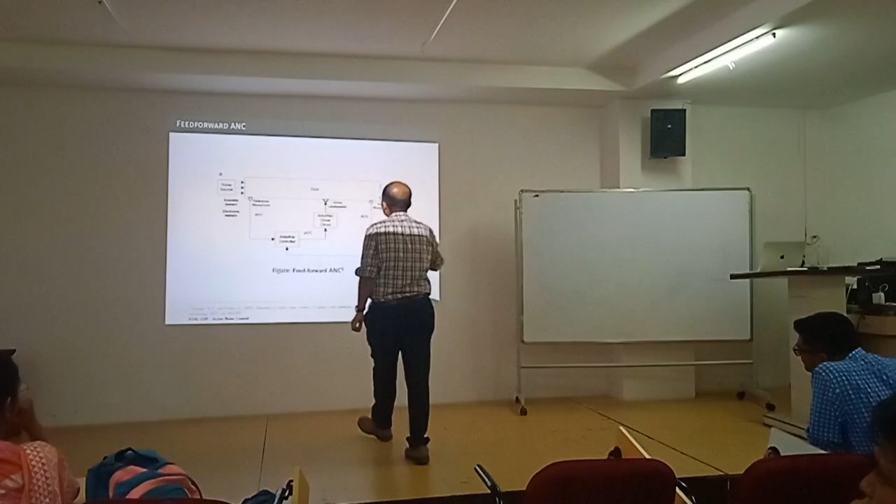Now from the bell experiment, what do you know? That if I want to cancel that sound, because energy has already been produced, I may have to produce some other energy to cancel that sound. That means some sound has to be created. Who can create the sound? A loudspeaker. That means one loudspeaker should be there. So what I did is I bought one loudspeaker and connected it somewhere in this tube.

Okay, I understood. So you have to go step by step for this diagram. First step is there is a duct, a tube through which sound is coming from outside. Then I have a noise source here. I want low noise over here. And now I know that if I want to cancel it, I should create some new sound. So I bought a speaker and put it in the tube.

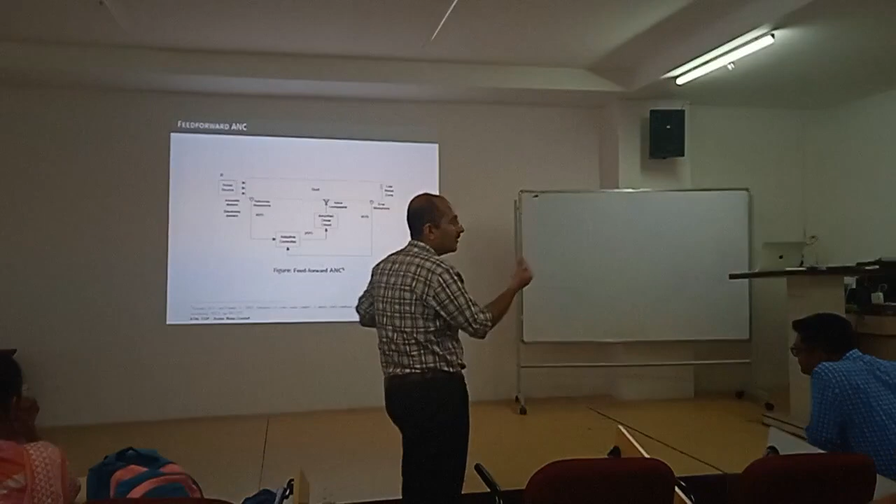Fine, now what all do I need to know? I need to know what type of noise is coming from outside, because I have to cancel based on what is coming. If you remember in that bell experiment, they connected something on the bell - some sensor was connected on the bell. That sensor is a vibration sensor, because sound is proportional to vibration, correct?

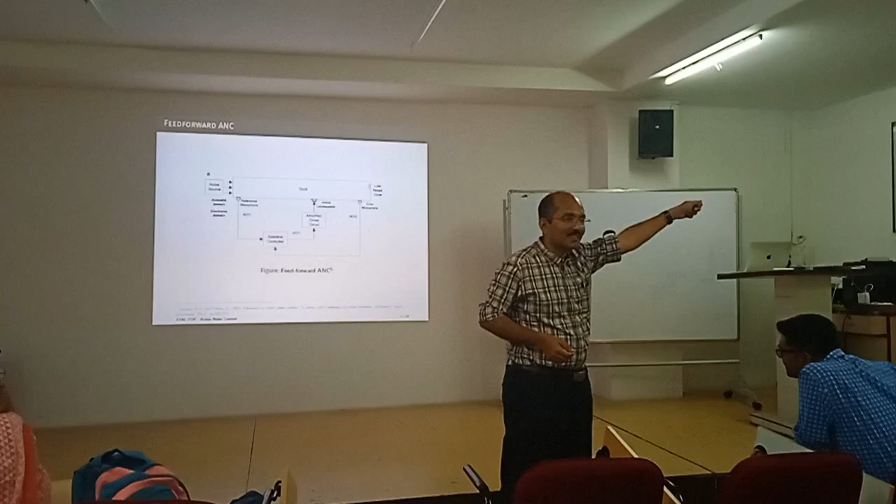So instead of putting a mic there, they put a vibration sensor on top of the bell. I should have some idea about the nature of the input signal. So in our case, because it is sound, I will put a mic outside my room, near the compressor. That mic is the reference microphone, so that microphone is my reference microphone.

Understood? So you have a noise source, you want low noise to be there, you have a duct, so you added one speaker, you added one reference microphone. Understood? This is how you are developing the problem. Nobody told Bose that this is how ANC is going to happen. By thinking, they have developed that this is how it is going.

Okay, fine. Then I should also know how much is the noise level around your ear, because that is what I should reduce. If you are only sitting here, I want noise to be cancelled only here. I don't want to worry about noise here. Correct? So I should have a measure of noise around your ear. How will I measure noise around your ear?

Put another sensor. Which sensor? One microphone. That is the error microphone, where I should put it near the low noise zone, because I want to measure whatever is the level of noise cancellation which is there. So I am putting a second one.

Understood? Now you know why I have two mics and one speaker. Is there any confusion on that? Why do I have two mics and one speaker? It's very costly. The speaker is costly, mic is again costly. Why would I unnecessarily buy two mics and one speaker?

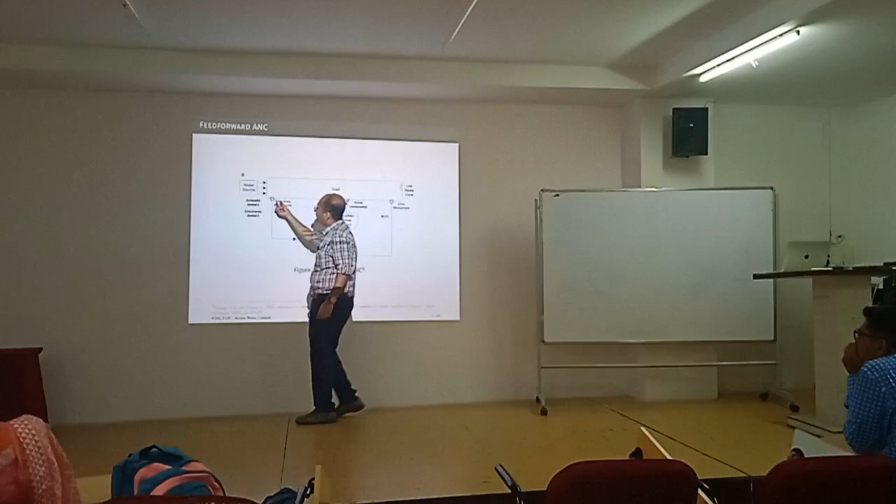So what I am saying is, you put a microphone, measure this, give it to a controller. Controller is some pole zero diagram. Finally, it is some pole zero diagram. Given to the pole zero diagram, that means the signal is modified and played through the loudspeaker. But where should I move the pole and zero here? I should move in such a way that this error signal is getting reduced.

Or I can say this E of n has to be reduced, or a square of the error has to be reduced, like in a machine learning problem.

Is this problem an optimization problem? What is an optimization problem? Give one example of an optimization problem. Maximize marks is an optimization problem, is it not? Because I am doing so many things to maximize my mark in the course. So that is an optimization problem.

Here my optimization problem is minimize error square or some function of error. Minimize error square. So what I am doing is I am trying to change my controller, or control my controller, in such a way that error square, or the signal level near your ear, is to be minimized. This is the problem. Now the question is, what is the algorithm and how will I know the algorithm?

Is the overall problem statement clear? Is the overall problem statement clear? Is the overall problem statement clear? Clear? Clear? Sure? Okay, now how will I decide the control?

All of you control system people, so you tell me, how will you decide the control?

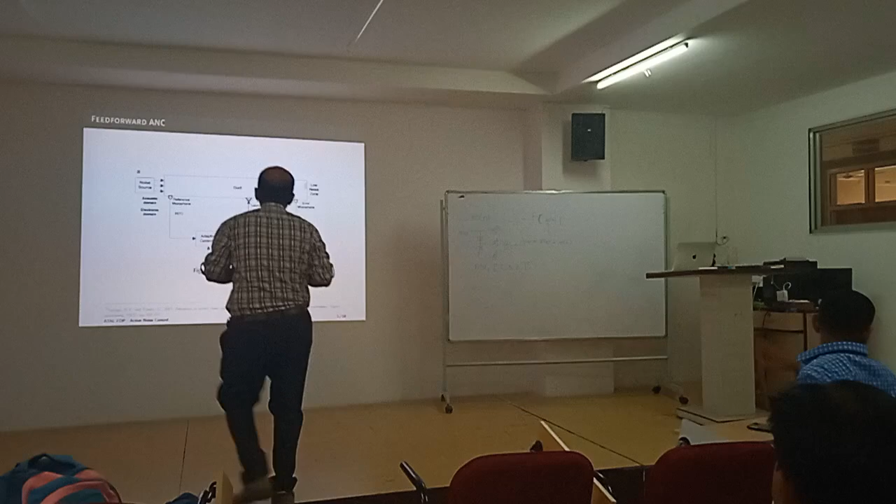What is the relation between Y and E? Difference of input and error signal. What is this one? Difference between input signal and error, this one and this one.

That will output. No, but this signal also contains signal which is coming from outside. Understood? Because if I put a mic here and say hello, that mic does not contain just hello, it contains hello and then something. So the mixture is measurable, your sound is not measurable independently.

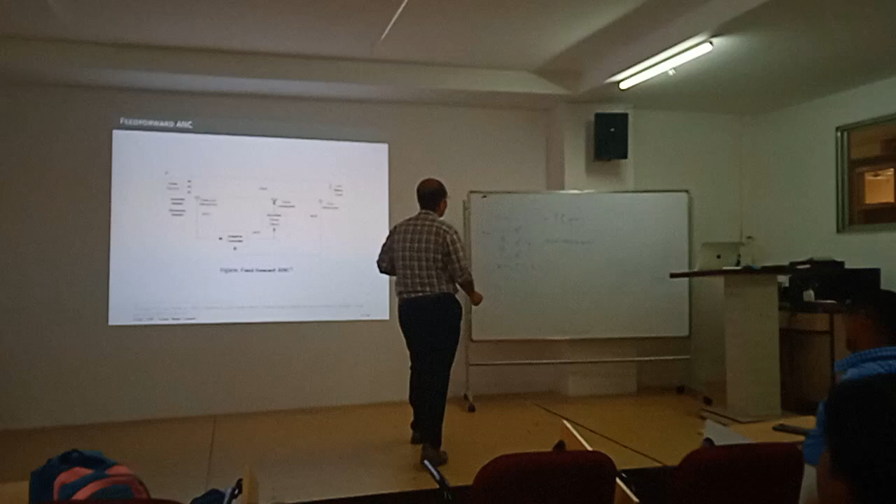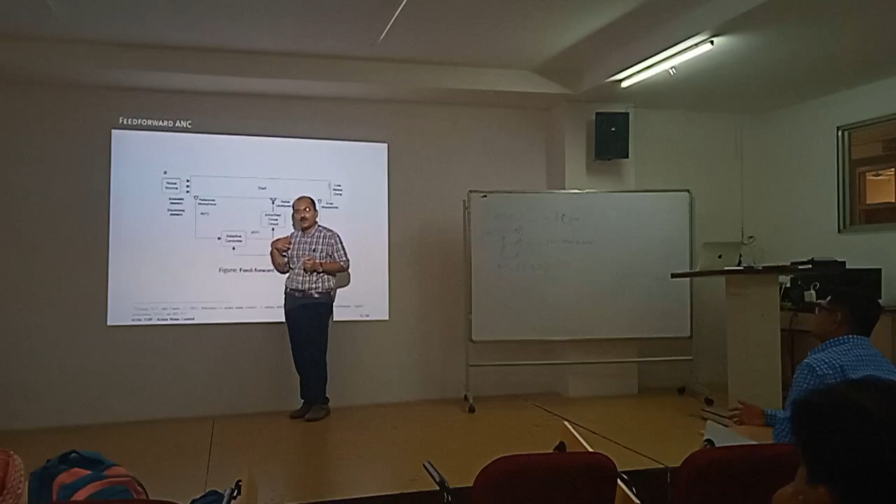But that is not going to solve my problem because I want to know what is the relationship between Y and E. For example, suppose I switch off this. Then what is the relationship between Y and E?

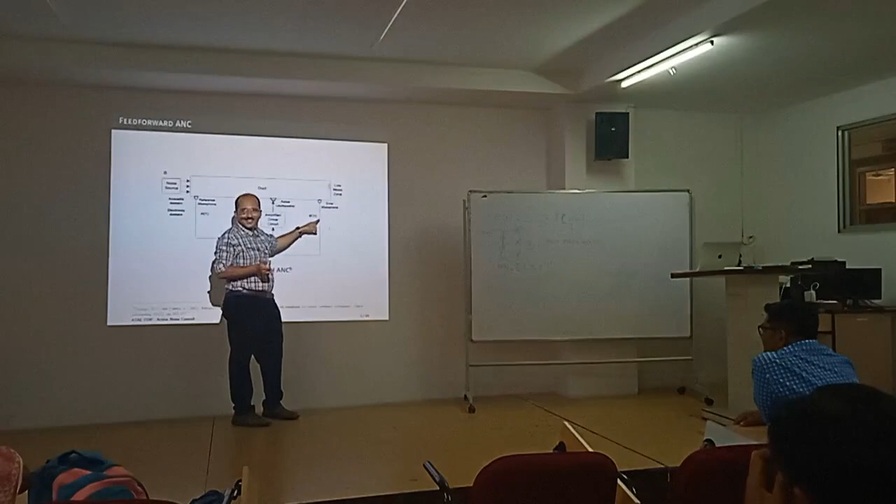Because now I switched off the AC, so no sound is coming from here. Whatever E is going to be there is only due to Y passing through this. What is this? That is a system. It is a system. What is that system? System has an amplifier, a loudspeaker, some air in between, and a mic. That is the system. But what is the input and output relationship of that system? How do I know?

How do I know? Because I don't know any equation of the loudspeaker, I don't know any equation of the microphone, I don't know any equation of the air in between. But I am asking you, for this physical system, what is the relationship between the input and the output? So whenever you have a physical system and you need to find the relationship between input and output, what should you do?

You should do system identification. What is system identification? Modeling, finding the transfer function. If I want to solve an ANC problem, step number 1 is that you do modeling, which is going to behave similar to that of the physical system. This is called system identification or modeling process. So step number 1 is a modeling process. Got my point?

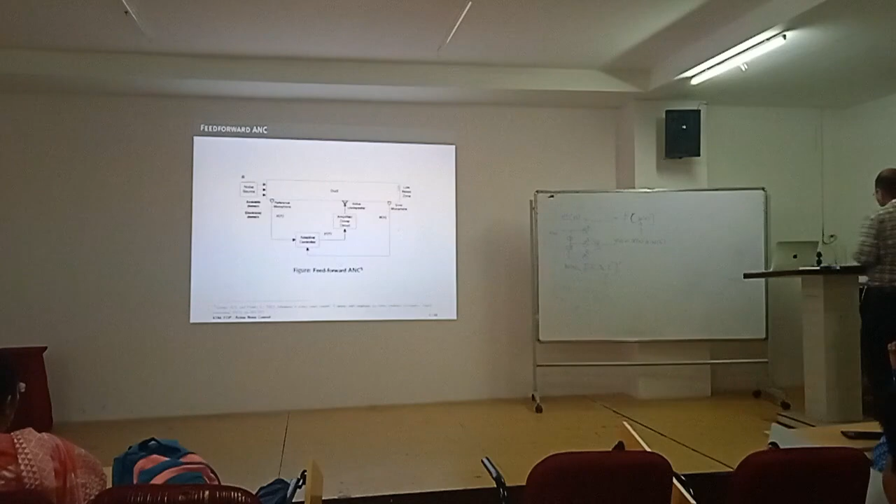So I formulate another optimization problem where I say you generate a random signal, play it through the actual system. What will actual system produce? Actual system will produce some output.

Play the same signal through the model. What is the model? Some filter, this type of filter where I assume the multiplier values are all zeros, or like exactly how we do in neural networks. So you have a physical system, you play some sound, same input signal through this model. This model is a filter where multiplier values are zero or unknown or random. What will that path produce? Some other output. Physical system has some output, model has some other output.

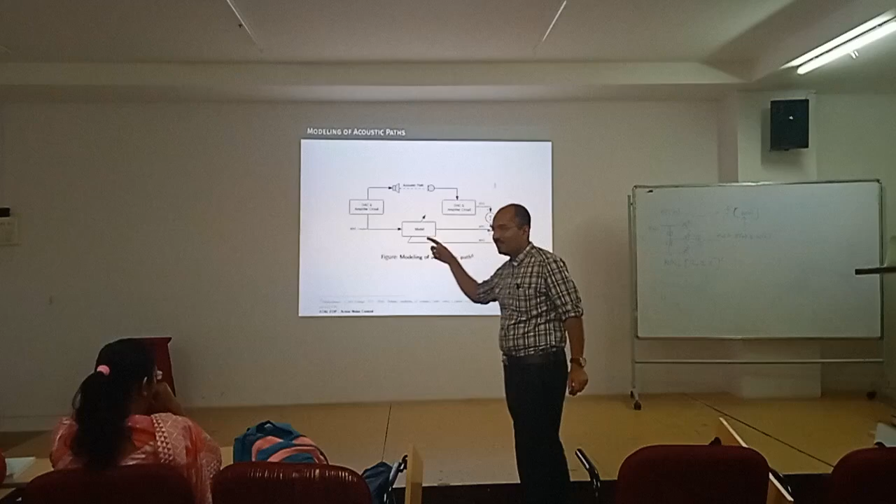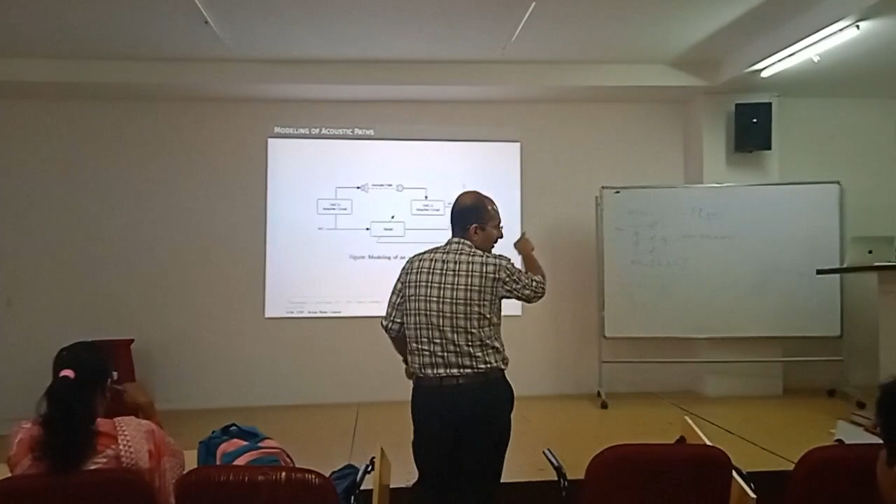So there is supervised learning happening. That means I need to again do an adaptation of the controller. Which controller? The model, which is the filter, such that this error square is minimized. You can imagine this is exactly a neural network function approximation problem. Function approximation, you do exactly the same thing, but here everything is linear, nothing is non-linear. So what we are saying is you do that adaptation.

Now if I do that adaptation, what is the model? This is this, where instead of 2, 3, 2, I have mentioned A0, A1, etc. I have created a vector A, just to generalize it. What is this X vector? X vector is x of n minus 1, etc. These are the two vectors. And what is y of n? Y of n is the output of the model, which is input convolved with the multiplier, which is also equal to A transpose X.

What is the output? 2 into this, plus 3 into this, plus 2 into this, add them together. That's the same one. So I am able to write an expression for y here. I will come back again, but let's see if you are able to understand or not. This is all simple only. But there is one very big point I want to say, that you don't need to study any of this.

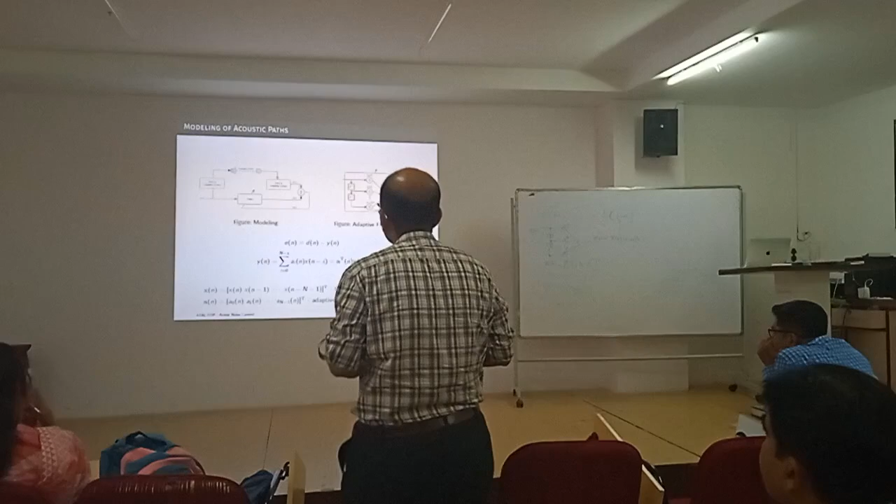Expectation of xd means how correlated are the input and output of the system, which is called cross correlation. Cross correlation means cross correlation between two signals. Which are the two signals? X and D. So I am defining one term called cross correlation, where you can imagine that as how related are X and D. So suppose I have a barrier in between, but this mic is picking up some other sound. So what is the correlation between X and D?

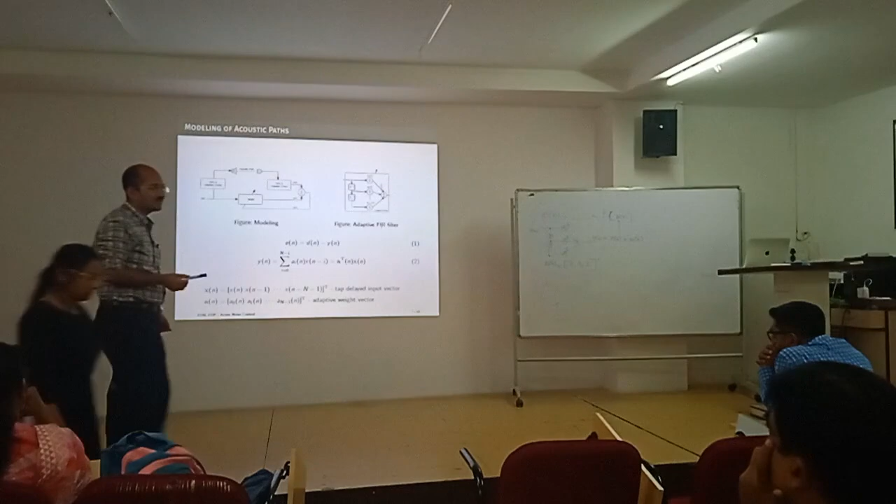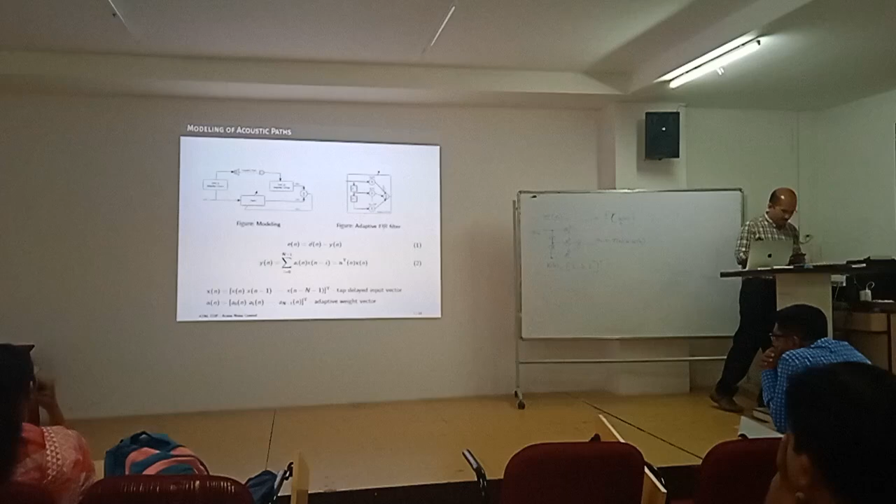Got my question? So right now what I am saying is D is fully produced by X. So D and X are correlated. There is a finite correlation between D and X because D is produced by X passing through something.

Now I am saying there is a barrier in between. So whatever sound is produced by the speaker is never reaching the microphone. But some other signal is coming because mic is there, it will pick somebody else talking also. So now what is the correlation between X and D?

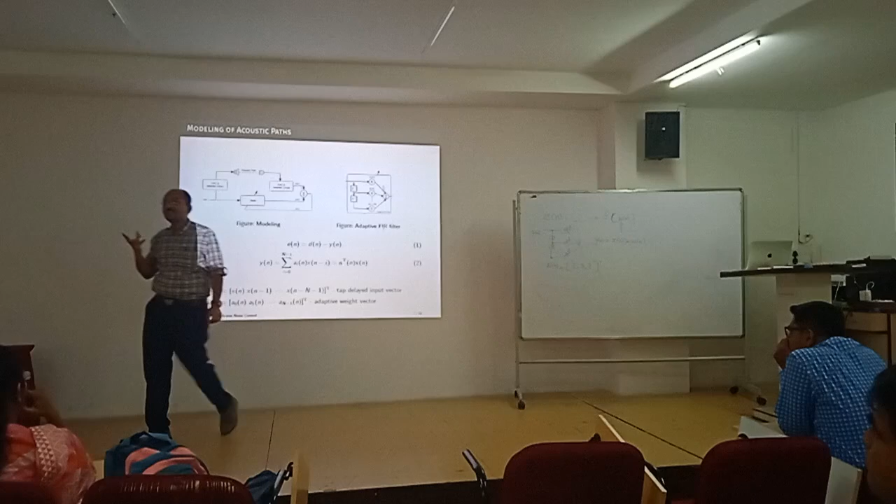Is D anywhere related to X now? See what am I saying? I am saying there is a barrier here. So this sound is not reaching here, but this mic is picking some random sound. So this D and this X, what is the relation? No relation.

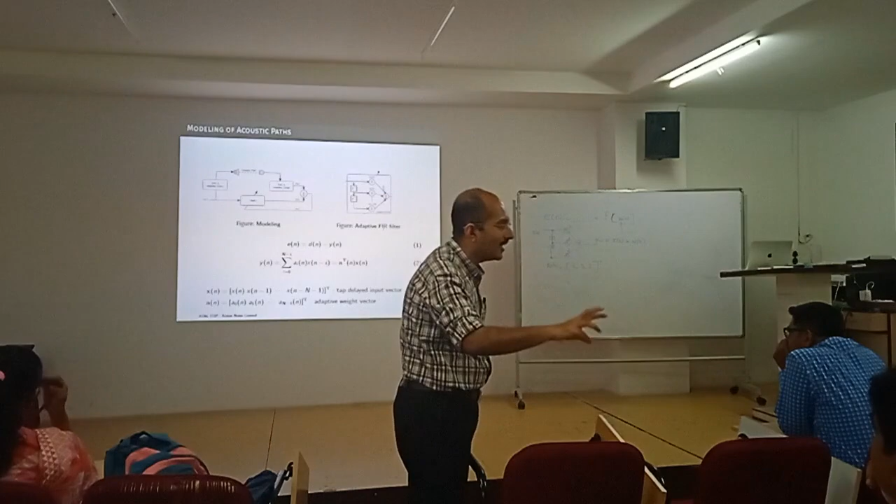There could be a situation where X and D are uncorrelated, but suppose the barrier is porous, like this, somebody is shouting there and we are able to listen here. So porous, what will happen? X and D are finitely correlated, but not fully correlated.

Understood? So we are defining the most important term of this lecture, which is correlation. Correlation means two signals are there. Are they related or are they not related? That is the simplest meaning of correlation.

See this expression, expectation dx is what? Cross correlation. Correlation between what and what? The d signal and the x signal. Then I am defining a new variable p. So the variable p in this entire expression is the cross correlation vector. This is called the cross correlation vector.

What is the meaning of cross correlation vector? How related is this signal x and signal d? In a normal case, fully related. Some cases slightly related. In some cases not related at all. Is that clear? Fine. Now you have here another term which is expectation of x transpose.

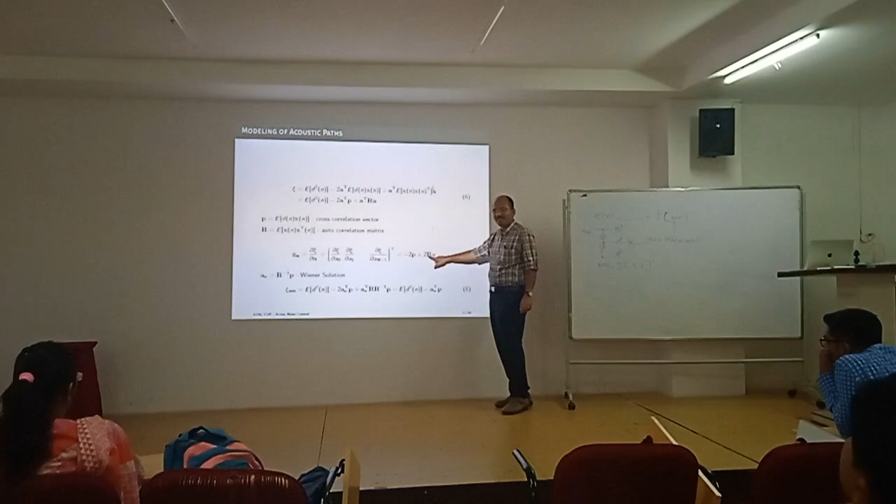The derivative is 0, so I can say minus 2P plus 2R is equal to 0. So my A optimal is given by R inverse P. R inverse P is the best possible value of the model. This is called a Wiener solution.

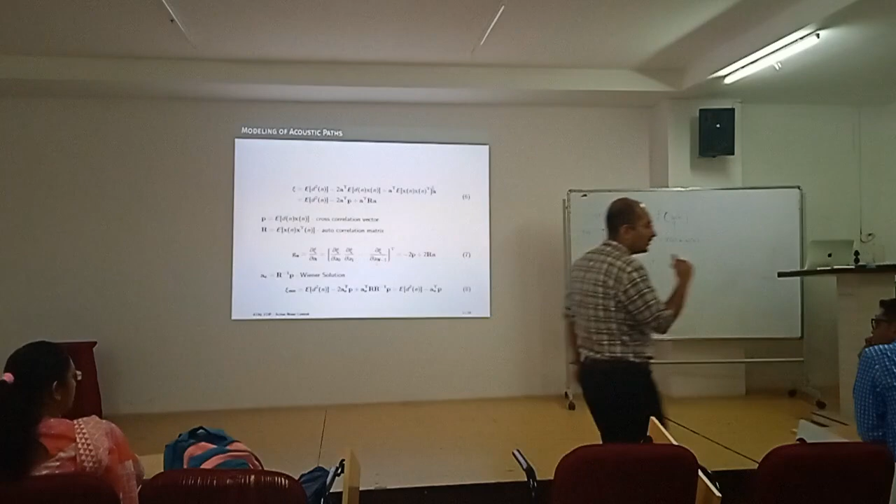What is it saying? That the best possible theoretical model you can find, or the filter which is equivalent to the path between the loudspeaker and the microphone, is given by this equation called R inverse P. That means this is dependent on autocorrelation and cross-correlation. Autocorrelation and cross-correlation depend on P, on how X and D are correlated. This is the most important part.

Okay, you got some idea now? There is a system, there is a model, there is correlation, there is autocorrelation, there is cross-correlation, there is system identification, and then everything goes into ANC. Understood? So by doing this process...

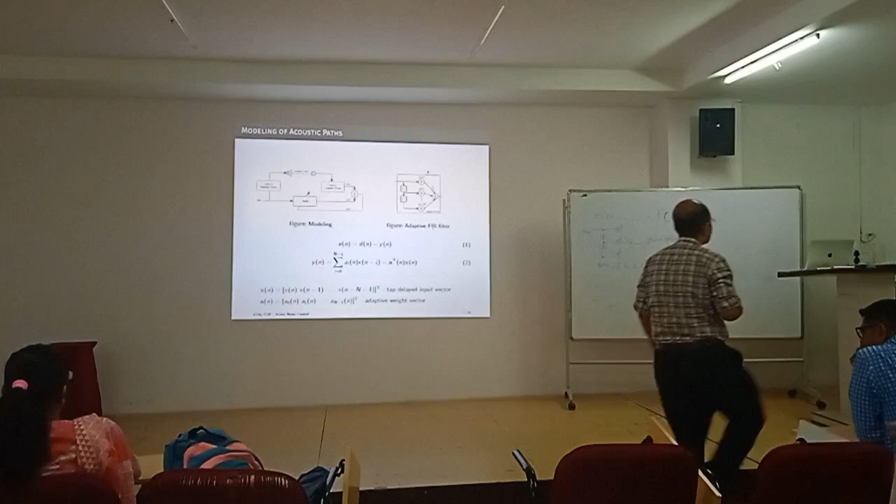So there is a combination of filters created here. Now what should I do? Run the next optimization, because we already did one E-square minimization to find the optimal value, to find systems. Now you are running the ANC's E-square minimization. If you do this E-square minimization, you will be able to find the update rule for updating the controller values. Okay, fine.

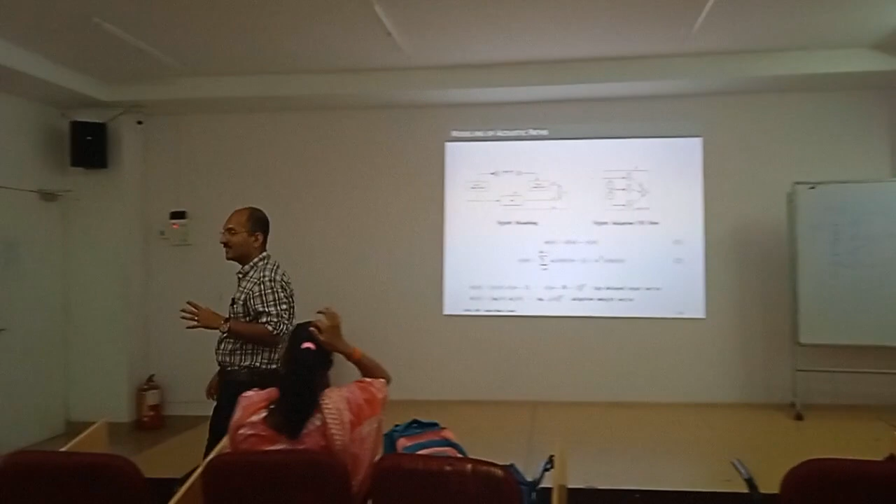So you can pause it. We are doing controller design with physical systems. Whenever you want to design controllers for physical systems, you need to create models, because otherwise you cannot write the algorithm. You have to write the expression and take derivative, but you can't write the expression because I don't know how the AC behaves, I don't know how the physical system behaves. But I know how models behave, because models are filters, and models are within the domain of electrical engineering. The system is not in our domain, it's a chemical engineering system or a mechanical engineering system which we don't understand.

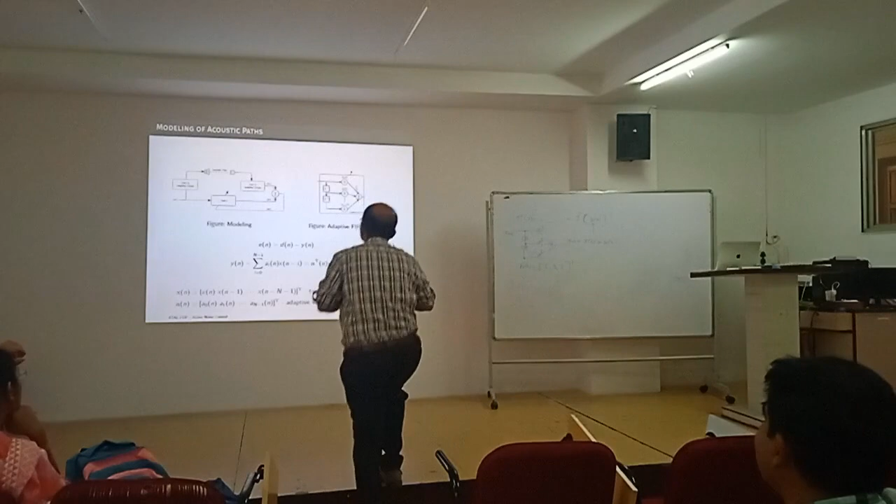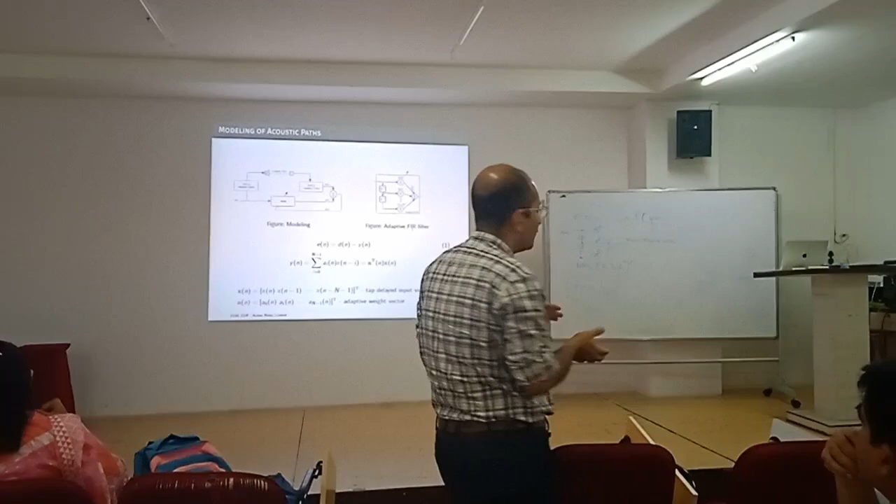But we understand systems, so we will model it and use it, not the actual system. That's what I am saying. So what we have done is, we have a physical path and I want to create a model of that path. So I generated some random signal, played it through the loudspeaker, put a mic somewhere, and measured the output, I got some value. The same input is given to a filter with some random value, and you get some output. So you have a difference between the output of the actual physical system and the model. You try to minimize that cost function, and we know how the cost function is going to be minimized.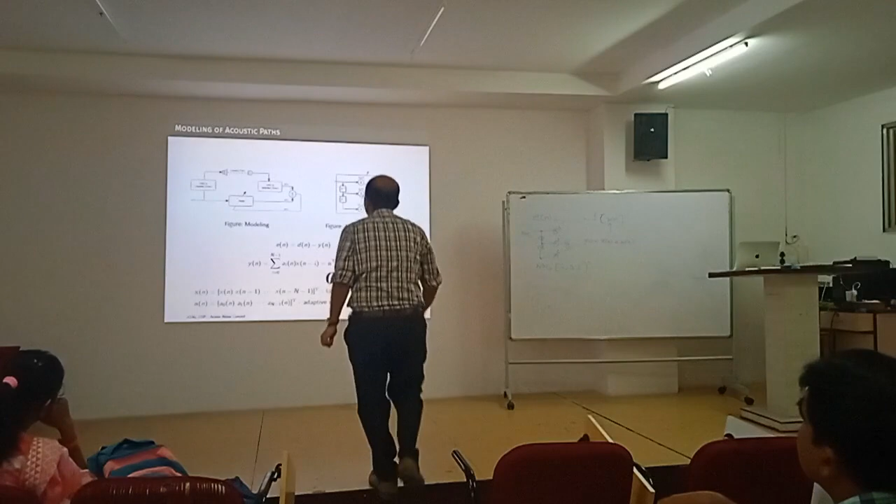The final, best possible value of the model is what? Given by R inverse P. R inverse is the autocorrelation matrix inverse and P is the cross correlation vector. This is the idea. Now, like what we were telling earlier, suppose I block this point. If I block this point fully and then do modeling, what will be my model?

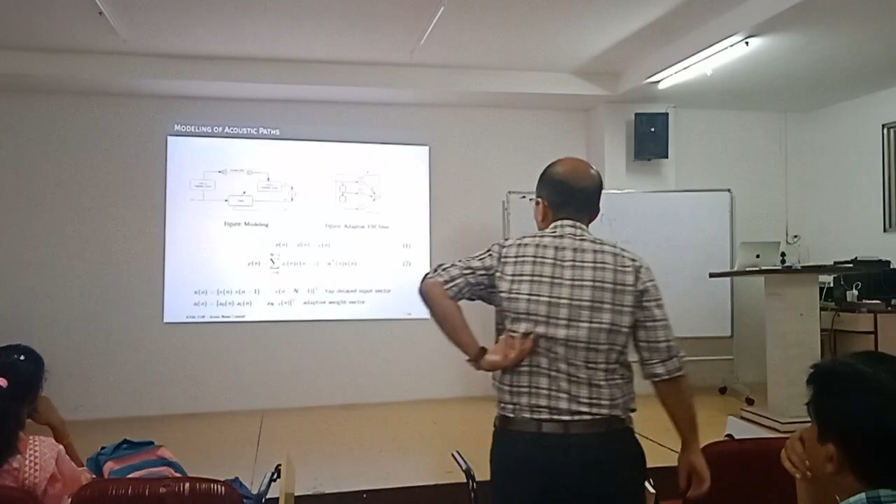Then I run the modeling algorithm. What will be in the final model? What is the best possible model? R inverse P, R inverse P is the best possible model.

Okay, so now I am saying the upper part is fully blocked, meaning whatever sound is produced by the loudspeaker never reaches the microphone. Now what will be the model value? Instead of 232, what will be the value there?

Instead of 232, what value should come? 0 should come, correct? Because there is no correlation between X and D. X and D are fully uncorrelated. So if you create a system and you are doing modeling and getting 0 output, you should not be unhappy. That might be because your input and output are fully uncorrelated.

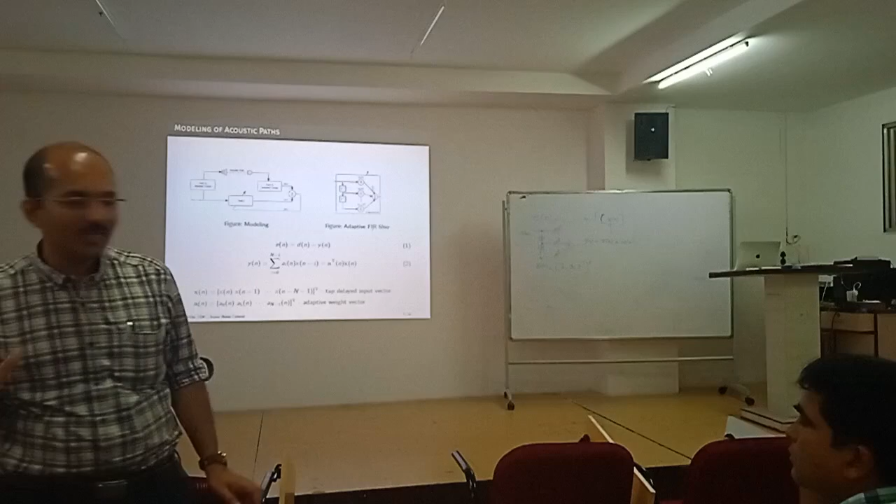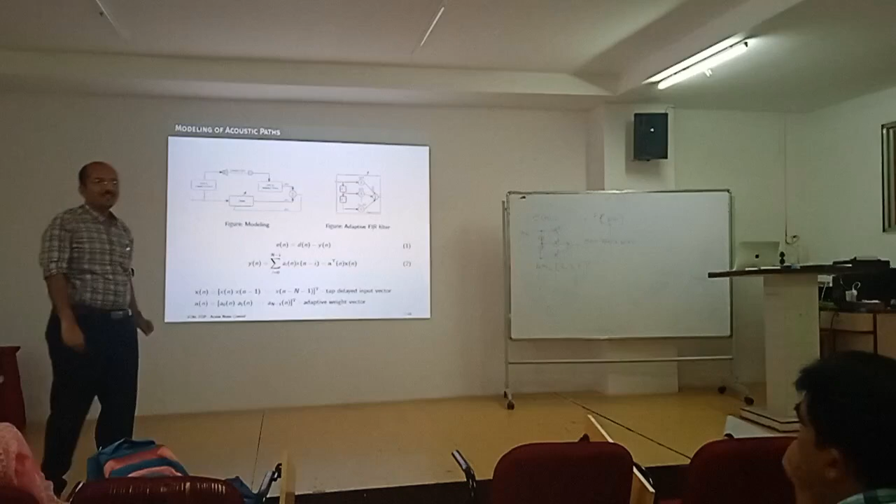Fully uncorrelated. Okay fine. Now we go into the case where it is fully blocked, but this mic is picking up some other sound which is not correlated with the input X. Now what will be the model? Are you getting what I mean?

Still it will be 0 only. Why? Because as far as the model is concerned, X and D are uncorrelated. But D contains one signal which is independent of X. It is independent of X. Understood? So now are you getting my point or not?

Now what magic is going to happen? I am telling you, magic is going to happen. Now suppose there is a slight leak here. Some part of the sound is reaching the mic, plus an uncorrelated sound is reaching the mic.

Now what will happen? The model is now not 0. The model is something, model is something. But what will be the error? Error will be what?

Error will be what? Because what can modeling do? Modeling can only minimize energy from D, remove energy from D using signals which are correlated with X. So the uncorrelated component which is there in the signal can never be removed. So my error will be equal to the uncorrelated component.

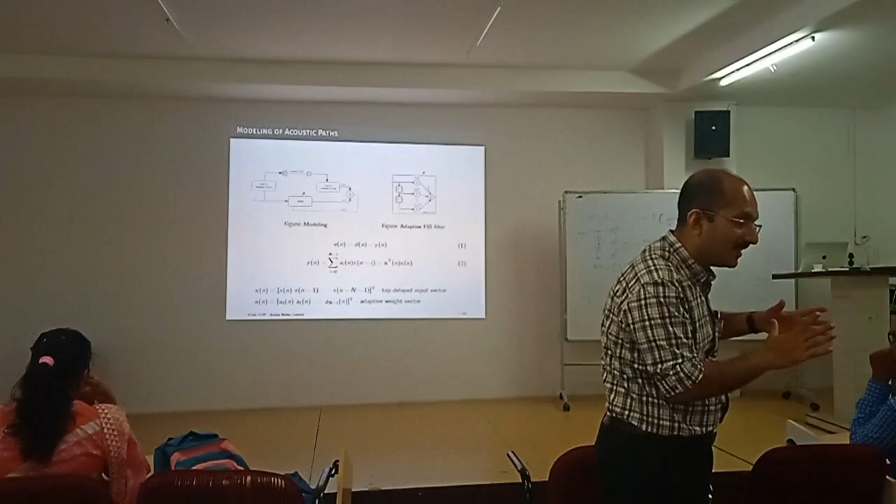That means this model is able to remove energy from some signal based on signals which are correlated to the input of the model or filter. This is the point, this is a big point, because finally everything is based on correlation. Everything is based on probability and random process, whatever is there. Because the entire machine learning is random process and probability. Everything we are going to do is all random process and probability.

Now let us take a use case scenario here, not an ANC problem. Suppose you are talking to somebody on phone in a market. What will you do?

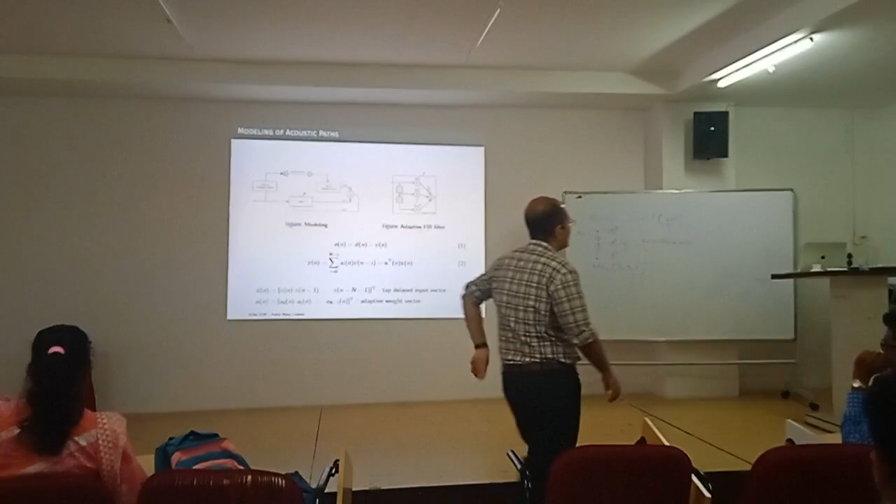So you don't go to market, or there is no market here. In Gandhinagar there is a market, here market is not there. Market is there, go to market. You don't go to market, everything is online only, everything is Big Basket. You go to market, assume that you have got... assume that your HOD is calling you. You have to talk, your job is at stake. What will you do? You cannot run away from the market, you have to talk from within the market only. So what do you do? You keep the hand like this and speak. This is what you do. So there is a mic here. What will the mic pick up? Your sound plus the surrounding noise. Both have been picked up, and your HOD now knows that you are not in the class, you are in the market. Job is gone. This is the situation.

Now, can I do noise cancellation based on what we have studied now? It is not ANC, I am not saying about ANC, I am saying about noise cancellation. Can I do it based on this idea? If you are able to formulate it, then the entire idea is clear. Can I formulate it?

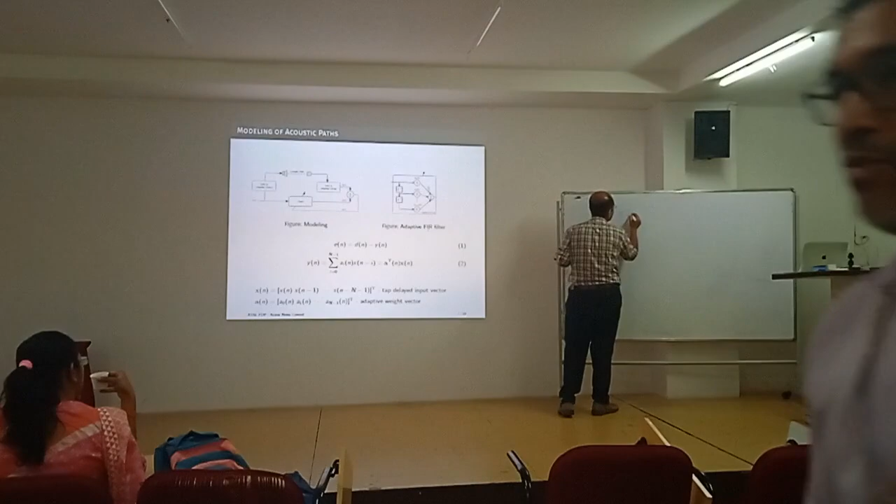Situation: you have a phone with a mic here, and this mic is picking up signal plus noise. Now can I remove noise from here? Can I put a filter, high pass or low pass, and remove the noise? No, because what is the noise? Somebody else speaking, same band, so it's an in-band noise. So I can't put any normal filter and remove it. But I want to do noise cancellation. What to do now? Can I use some concept from what we learned now?

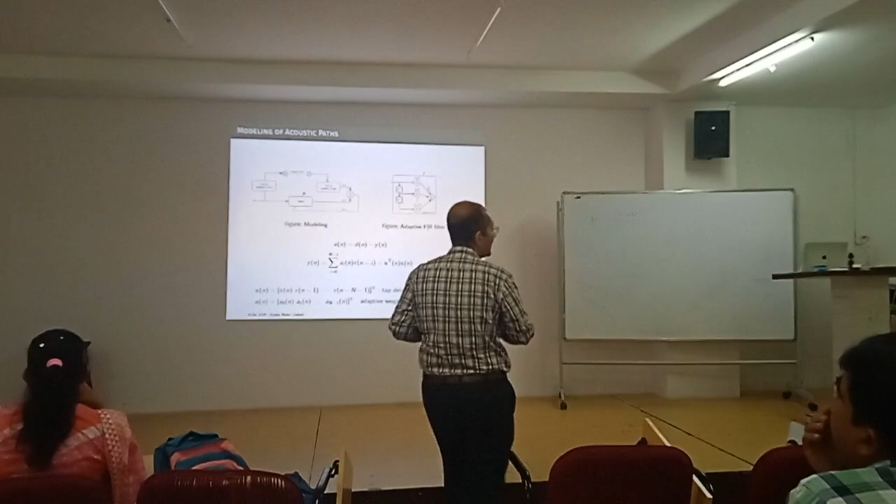So suppose I put a second mic on the back side of the phone. It is there in your phone. I have put a second mic on the back side, so now I am changing my design, and I am saying that I have M1 and M2. So what will M2 pick? M2 is here, we are talking like this. What will M2 pick? Noise. Is this noise and this noise the same? No, they are different. So the first mic is S plus N1, and this is N2.

So you cannot do a subtraction, because one mic is here and another mic is here. This noise and this noise are not the same. But are they correlated? That noise N1 and N2 are not the same. Is N1 and N2 correlated? Yes, because N1 and N2 are produced from the same source. N1 and N2 are correlated. Now can I use that idea to remove the noise from here?

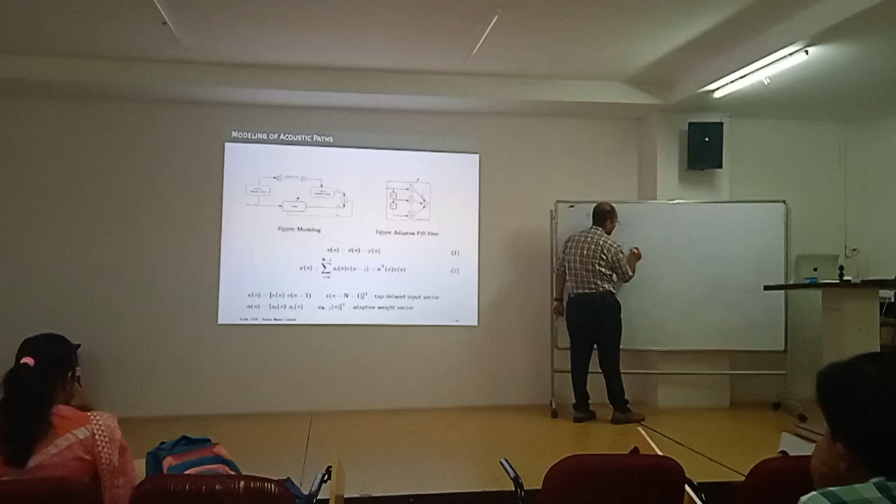This is the controller.

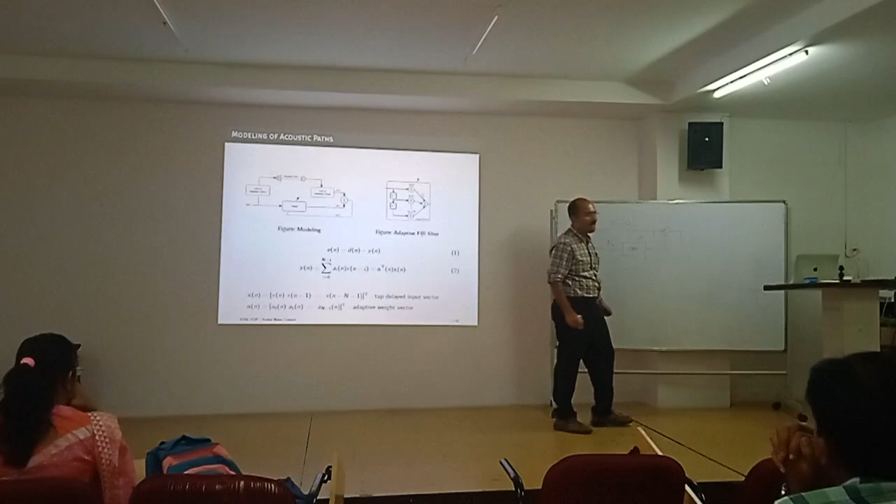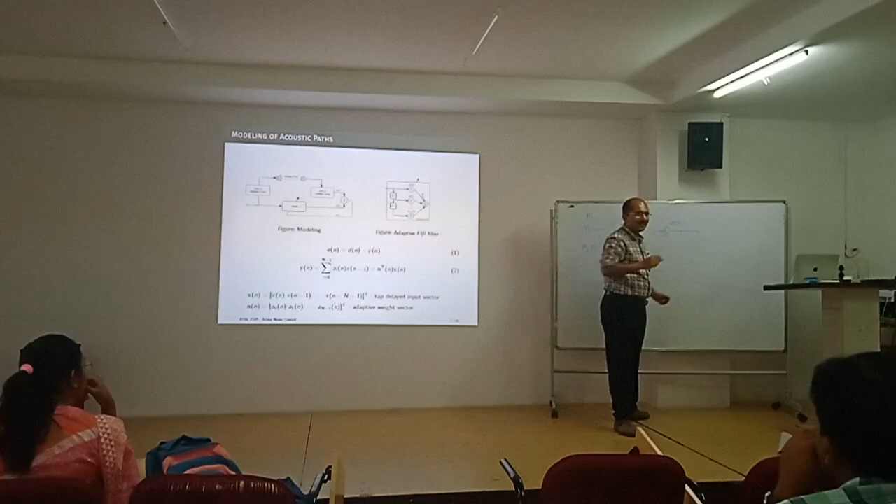What did I do? I said I take the second mic input and give it to a filter or a controller. The controller will give some random output. I am finding the difference between those two signals, so I will get some sort of an error signal. And I tell the algorithm to minimize it. How do we minimize it? By updating these weights.

What will the controller do? How much error can we minimize? Only signal components which are correlated to the N2 input. So from S plus N1, what will get subtracted? N1. N1 will get subtracted because N2 and N1 are correlated. So N2 will try to remove energy from N1, and it will not touch S because S and N have no relation.

You can relate these two, these are the same. See what I am saying? This signal is N1. This signal is N2. This one contains S plus N1. S is the uncorrelated component. So what can this filter do? The filter can only remove...

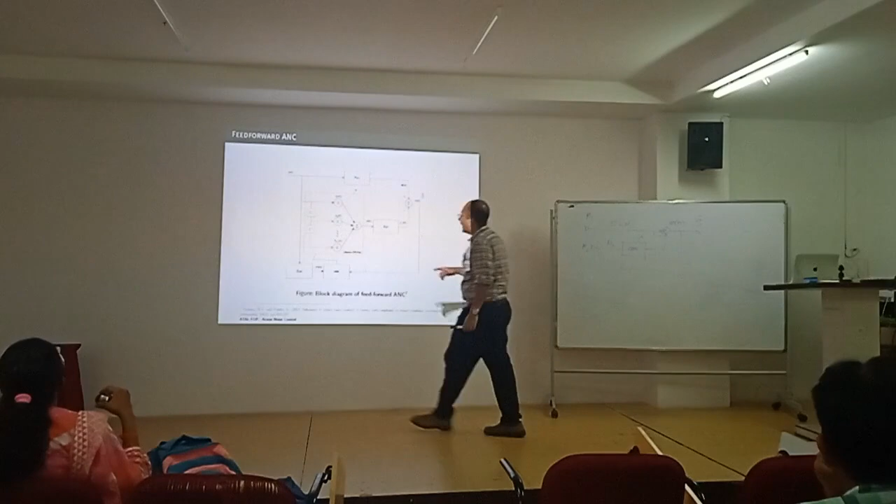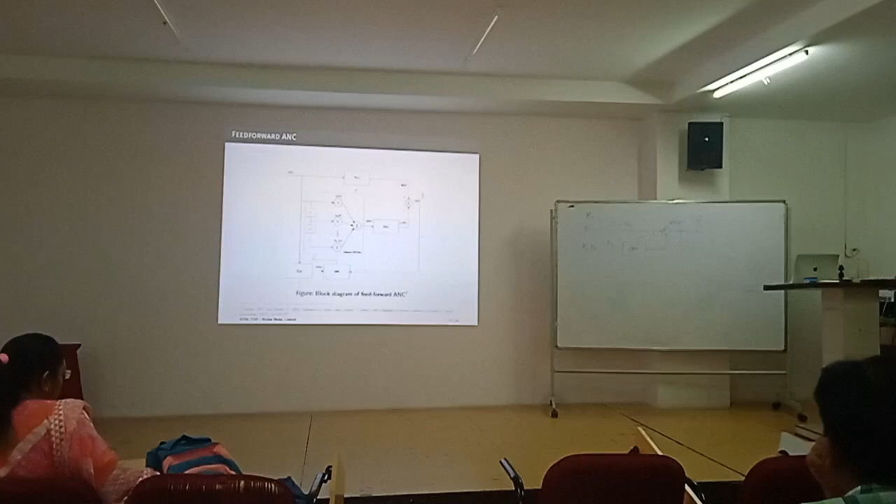So similarly, if I do an algorithm for this, what I will be doing is again a least square minimization. Then when I derive it, I will get an update rule. What will be the update rule? How my A values are going to be changed in an iterative manner, step by step, to what we are going to get. So I get some other algorithm which is not LMS, it is some other algorithm.

Okay, let's see, can I do it experimentally? Can I do noise cancellation experimentally? That is our next step.

So what I want to do is create an experiment and show that noise cancellation can work. Not in a headphone—there are already a lot of headphones in the market. What I am doing here is what is called an active headrest system. Active headrest system means you are sitting in a chair. When you move forward, no noise cancellation will be there. When you move backward, the noise will be cancelled. This is called an active headrest system.

It means you want to give this noise cancelling experience to people in your car, but we don't want them to wear a headphone. And we don't want to cancel the entire noise either. We want to cancel noise only in the region around their head. No need to unnecessarily do cancellation everywhere. Like in the baby's case, only near the baby's head do we need to worry about it. That is called an active headrest system—you create noise cancellation in the chair or the seat, not in a headphone.

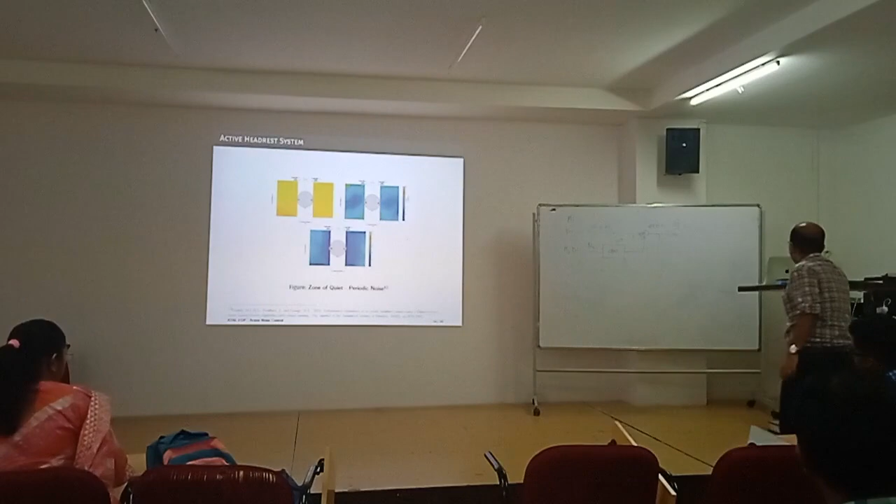Sound effect. Is the sound reaching you the same as the sound reaching you? No. Why not? Give a technical answer based on today. What has changed when I went from here to here?

The transfer function. Correct? So there is a path between the speaker system and your ear. There is a different path between that speaker system and your ear. There is a different reflection also. Correct? That means every seat has a different transfer function. Can I say that? Every seat has a different transfer function.

There will be some transfer function which gives me the best speech or audio quality. There will be some other transfer function which gives minimum speech audio quality. Visually, you already know where to sit. So you can have a weighted average of visual quality and audio quality and say that this is the premium seat. That premium seat may not be the center, some random seat which normally people don't take. We say that is the best seat based on measurement. You may get like that - we don't know.

That means I could use a modeling experiment to actually measure and say that there are premium seats, scientifically proven. Measurement - these are sensor technology, where we are doing modeling of that room, and every theater will have a different seat pattern. Why? Because their acoustics is different, seat arrangement is different, speaker system is different, wall paneling is different. So this measurement has to be done for every theater separately, and a separate pricing pattern has to be kept. Understood? This is the system. This is the application.